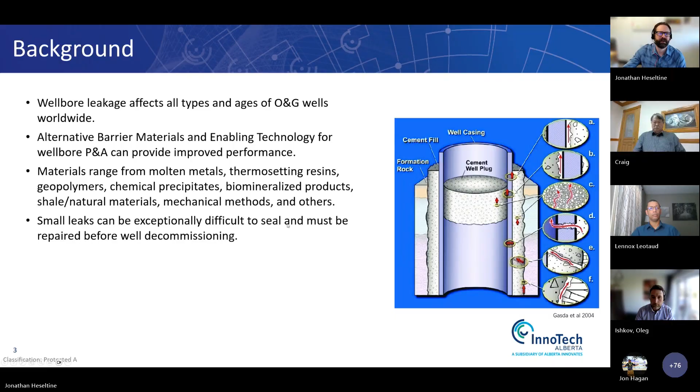With these types of wells, it's often the leaks that are difficult to repair, and due to regulations, when the well is being finally decommissioned, all of those leaks must be completely sealed off. So we're looking for alternative barrier materials or technologies that have characteristics that let us do that.

I won't read this list outright, but we're looking for the types of materials that can squeeze into small flow paths, cure into an impermeable material, and that can be placed properly in the presence of other fluids and the chemical and temperature environment. After they're placed, they must seal for eternity, so they must be resistant to corrosion and the other downhole conditions.

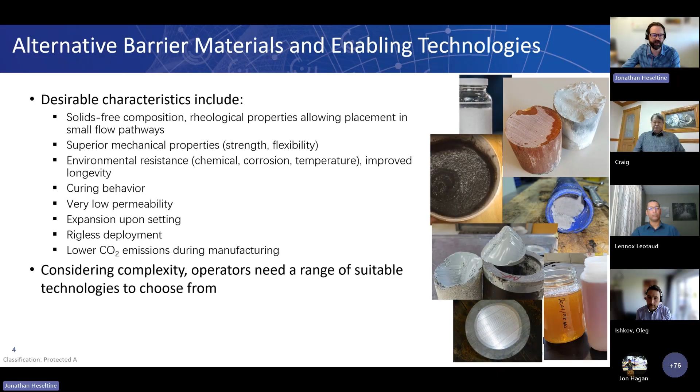We know that all wells might be similar, but they're all different in their own ways. So we're not looking for a silver bullet of one material that will solve the problems. We need a range of technologies to choose for a particular application.

With that, InnoTech has been involved in a joint industry project that's now wrapping up, with a mission to expedite the development and understanding of these types of new barrier materials. The methodology follows a pretty logical process.

We selected five products based on the participants' interests and expectations. Technical review of those materials allowed us to plan our lab testing program. In InnoTech's lab testing, we've developed an approach that's quite pragmatic, trying to simulate the downhole environment for the placement, sealing, and long-term durability of these materials.

When the materials have gone through the lab testing protocol, we have now completed 14 field trials with these materials. And then, of course, as a collaborative, data sharing is a very important part of the process.

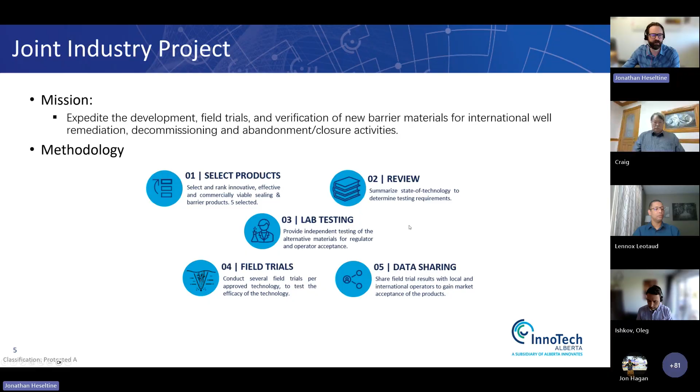So the objectives of this work are to define the suitable applications, sort of the operational envelope and best practices for these materials. To understand what wells we can use them in, we need to understand how they work and where they're best applied.

With that, we start to understand and realize there are regulatory and technology gaps that we can address. Working with material developers, we can optimize products. We're sharing the data and discussion within the consortium and publicly. Ultimately, with the understanding and development of these materials, they may become routine solutions to a widespread problem.

In terms of broader industry benefits, we're looking for a functional improvement compared to cement or other methods, where we can have eternal sealing of wellbores with confidence and understanding. This will lead to emissions reduction. There's direct leakage of gas from the wellbores, but also emissions due to the operation of the intervention.

The cost associated with decommissioning the worldwide inventory of wells is very high. So some industry groups have targeted a 35% reduction in decommissioning costs. There are other benefits, such as reclaiming land use where the wells are and reducing other risks, such as the liabilities of the suspended well inventory needing to be decommissioned, risks of groundwater contamination, and health and safety associated with these wells.

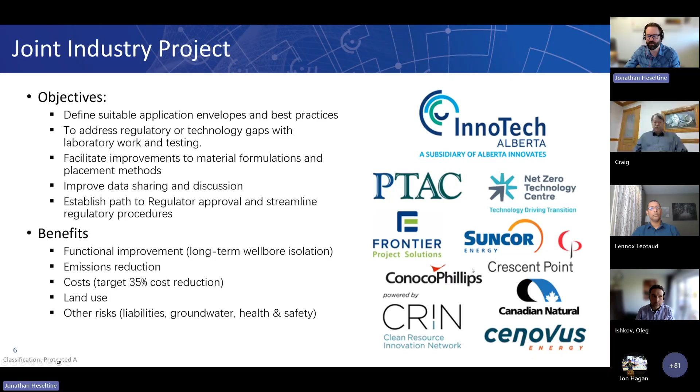You can see in the image there, we have a lot of participants in this project: funders and technical providers, as well as operating companies who are providing their guidance and wells for the field portion of the study.

To get into the technical results of this work, as I said, it's wrapping up, but just a few observations: what we've seen is that these materials do indeed have an envelope where they're best suited. So the lab testing work is to understand which types of wells these are best applied in.

The lab testing, due to its nature, tends to look at the material's technical performance. When you move into our field trials, we now have the whole as a system, and the geometry of that system and the requirements, as well as the chronological deployment process, are all considerations in planning the intervention.

So with that, full evaluation of these materials must look at the technical performance, the sealing, the longevity, displacement of fluids, contamination, all of those things, but also in the field, have to consider safety and environmental considerations, as well as time and cost of deployment.

And then finally, collaboration yields major results, major benefits. We've seen that throughout this project. The spirit of it is very much collaborative with the operators and with the technology vendors. Everybody wants these solutions to work. So there's been a great effort to share the results, and I think everybody benefits from that.

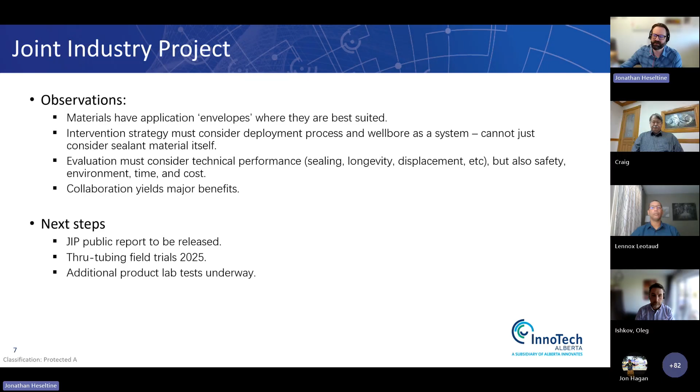In terms of next immediate steps, the public report from the project work will be released very, very shortly. You'll likely find a link on Innotech's website, NZTC, or PTAC, depending on your preference. There are currently additional field trials going on for through-tubing abandonment procedures. The idea here would be to plug a well without pulling the tubing first. We have additional products being tested in the lab right now. So those are the immediate next steps, and we have other work planned.

So with that introduction, we're going to move into the presentation component of the webinar. We have three speakers today who I'll introduce briefly here.

Our first speaker is Oleg Ishkov. He's the CEO and founder of Rockit. Next we'll have Lennox Leotaud. He's technical marketing supervisor for Well Armour and also the president and co-owner of Olive and Branch Merchandising and Distribution. And then our final speaker will be Craig Brown, the founder and inventor of UVT Solutions.

The structure of the webinar, as John mentioned earlier, we will have a speaker followed by about 10 minutes of Q&A. Please type your questions into the chat while our speakers are presenting, and I will read them out following the presentation. If we have some time at the end, we can circle back to any unaddressed questions or any questions for any of the speakers.

And so with that, I will turn it over to Oleg from Rockit. Thank you, Jonathan. So I'll share the screen.

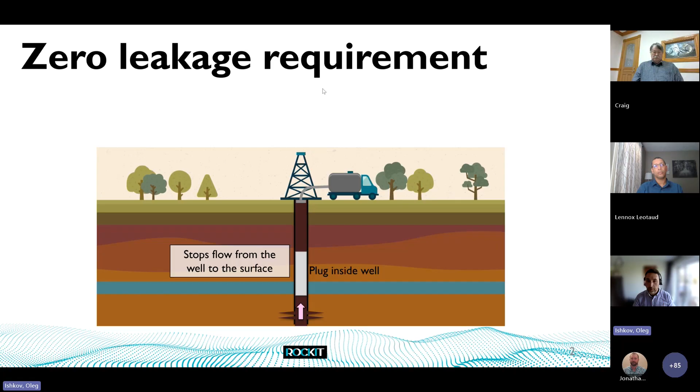As Jonathan mentioned, one of the hardest challenges is actually sealing the smallest pathways, because the current industry approach is most solutions install plugs that cut the flow from the wellbore to the surface, right? But unfortunately, the leaks still persist.

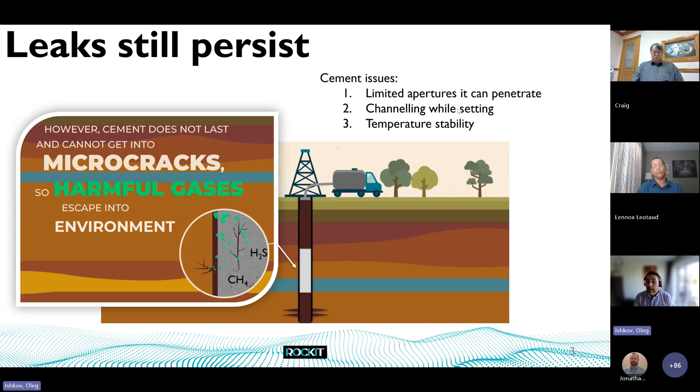If you're talking of cement, obviously we are not targeting to completely replace the cement. Cement is good, it's fantastic material. But obviously in the industry, there is well-documented issues with cement, and it cracks, it's brittle, so there is a limit due to viscosity, the solids present in cement, and the temperature stability. So at the moment, there is a demand for new solutions.

So Rockit is different in this case. We are offering a seal, and we're creating a barrier at the source. We are cutting the flow from reservoir into the wellbore. So in this way, the plugs, cement, or some other metal alloy materials can be better protected from future degradation.

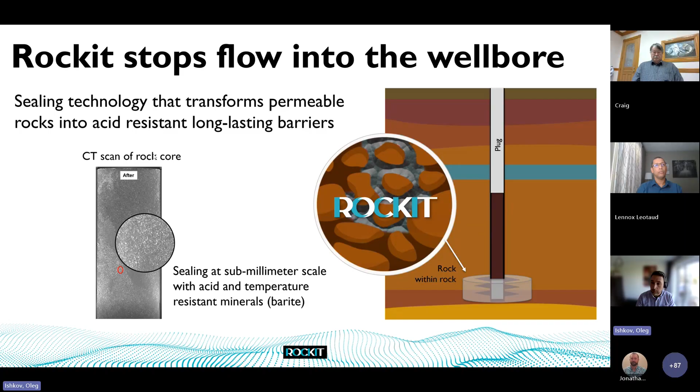So in essence, our technology transforms rocks into barriers themselves. And we use acid-resistant, long-lasting minerals which is very well known in industry - it's barium sulfate, and this material is naturally resistant on geological timescales. On the left, you can see this CT scan of the rock core sample that we sealed with barium, with our Rockit seal, and basically this illustrates that we can penetrate into the smallest pores and seal within the rock.

Also, the technology we offer uses solids-free aqueous solutions, two of them. We don't use any other scale inhibitors, or we don't require any nutrients. So it's just two solids-free liquid aqueous solutions pumped into the well, and then, through a reaction in the formation, those chemicals react and precipitate significant amounts of minerals.

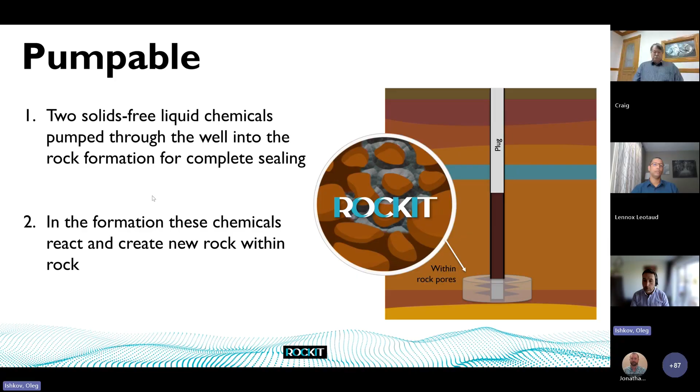So we call it rock within the rock. By doing so, using the solids-free and low viscosity solutions - viscosity of our solutions is very close to water, so 1.4 centipoise - we reduce the risk of fracturing. So basically, we can inject wherever water can be injected.

So we can address the smallest flow path, and because of this, this also opens up a door to use our solutions as the potential for rigless application, because in a sense it's just aqueous - basically salty brine or aqueous solutions you need to pump. But the material properties of barium sulfate open up a door for permanence.

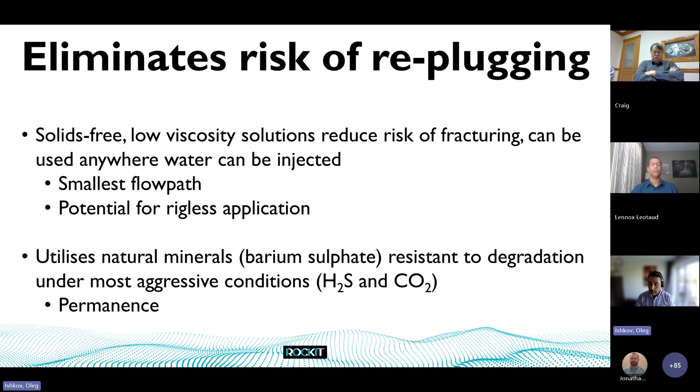Basically, the barium sulfate is one of the hardest scales known in the industry. It's very difficult to remove. As soon as it adheres very well to steel, rock, and any materials, it withstands most aggressive conditions, high H2S and CO2 content, and it's one of the extremely insoluble minerals known so far. So this is a very permanent material.

So building on this, we believe that there is opportunity for significant cost and time efficiency, because standard pumps can be used. There is no tools requirement, so high pressure pump, and the procedures are very well known. Consider this as a squeeze treatment - when you squeeze solutions, it's a very well known, established procedure with an established verification process, and the reaction is quick.

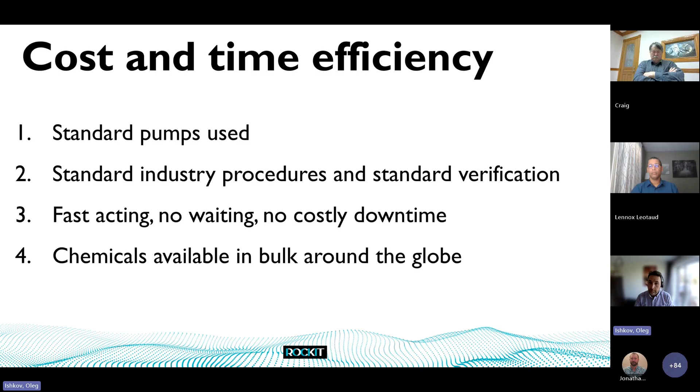And then another advantage that we came up with in our research and development is that the chemicals we use are already available in bulk around the globe. So we can scale this with the help of industry partners much quicker, and we believe this could reduce the barrier for industry adoption.

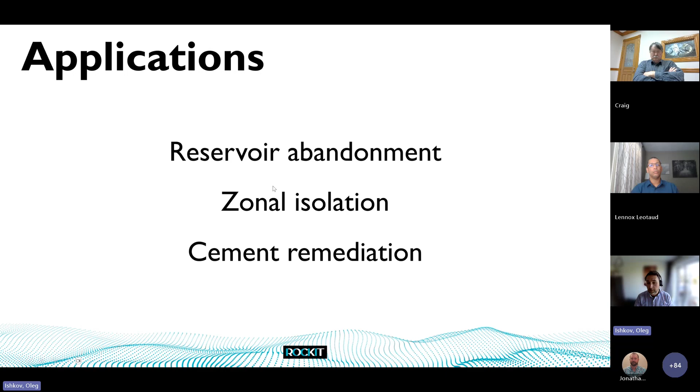There are different applications that Rockit can be applied to, spanning from reservoir abandonment to zonal isolation and cement remediation. And speaking of the deployment options, there are several methods that our technology can be deployed. The very first one - and again this is our target and how we think ideally it could be performed - is using bullheading or using a single flow path, iteratively.

Because we use 2 solutions, they need to be separated with an aqueous spacer to protect the flow path itself. However, there are also different deployment options available. For example, we can use coil tubing - we spoke with providers of coil tubing. So if the well is not deep and quite shallow, the coil tubing can deploy the first solution, then the coil can be pulled up, cleaned, and the second solution can be pumped.

This way, we remove the need for an aqueous spacer between the two solutions. If well design allows, we can also deploy concurrently through different flow paths - for example, through the production tubing and behind tubing, we can discuss it. Or, for example, with concentric coil tubing. And obviously, if specific targeting for the placement is required, our solutions can be deployed via the tool.

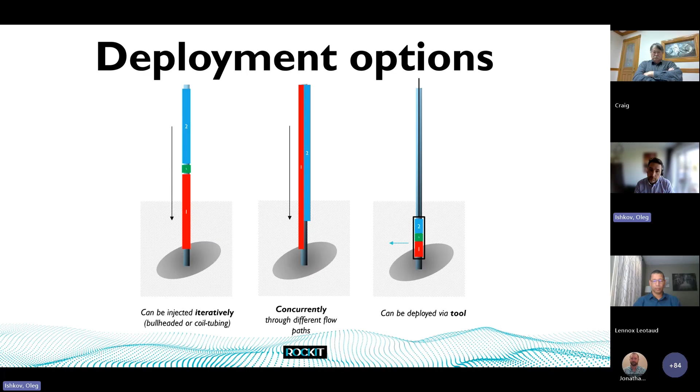This gives a downside in that with the tool you're limited with volumes. With bullheading, you're not limited with volumes. You can pump as much as you need.

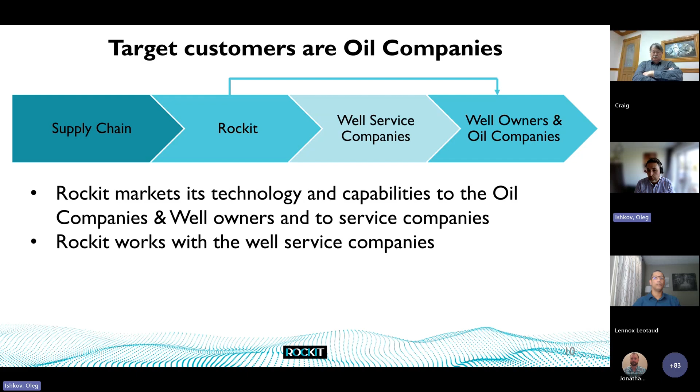Now, how do we plan to take this forward? Well, we don't have pumps or capacity to provide services. So our target is to work with oil and gas companies, but with partnership with well service companies who already have capabilities, pumps, and established relationships, who would deploy our solutions to the oil and gas companies and take care of the supply chain and basically provide the product. And the product is salts that need to be dissolved in water and just pumped.

So where are we at the moment, and how do we see this taking forward? Rockit is a fully functional prototype. We believe we are at TRL level 5, and as a note, our lab has decades of experience actually preventing mineral scale from precipitating. So we are turning this problem into a solution.

We've run a lot of tests, and we can block the rock and hold 1000 psi pressure differential with no flow on effluent. We can destroy the permeability by almost 99% and more. And it's not just us who tested this technology - it was validated with one of the oil and gas majors in their R&D labs. We have patents granted in the US and UK. And behind us we have a very experienced team of oil and gas veterans.

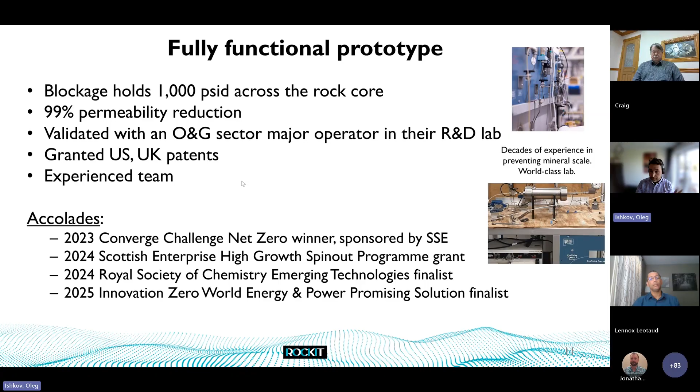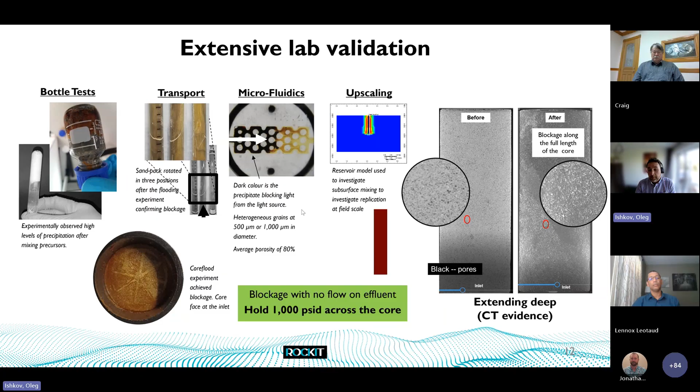In the interest of time, we can leave that for later discussion. But the key message is that we've done extensive lab validation, and the next step for us is to engage with established partnerships to narrow down the commercial case for adoption, be it cement remediation or reservoir abandonment, and then establish partnership for the field pilots.

So if I may, my ask would be that if there is interest for our technology, we would be very happy to hear from you. And if you supply well candidate parameters, we can then model the deployment, design the treatment, and provide you a cost for the field pilot, and we can take it from there for the future success of the technology.

I hope that in the end we will be successful in building this sealing technology that will leave no leaking wells for the next generations. This is our big goal. This is me, thank you very much, and I would very welcome questions.

Thanks, Oleg. A few questions coming in, so I'll read them out. The first is from Ken Massich: what sort of reaction time is expected for when the two substances come together in contact?

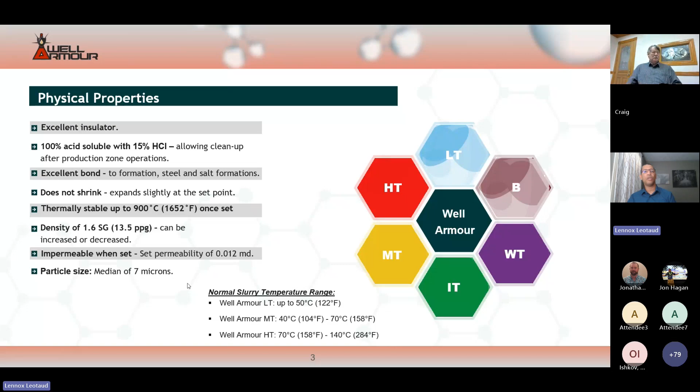So the Well Armour slurry does have a particulate fraction to it. That being said, unlike say a cement slurry, if you were to use the Well Armour slurry in a tight formation, or you're looking to squeeze it into a very narrow channel, even if you were to screen out the particulate fraction of the Well Armour slurry, the filtrate will still set. So that's a big performance difference of the Well Armour as compared to a cement slurry.

That is when it transitions from a liquid to a solid state. That transition, which we call a right angle set, always occurs within 120 seconds. By contrast, a cement system goes through a gel strength development phase when it transitions from a liquid to a solid material, without having to provide too much detail, it is this static gel strength development property of cement

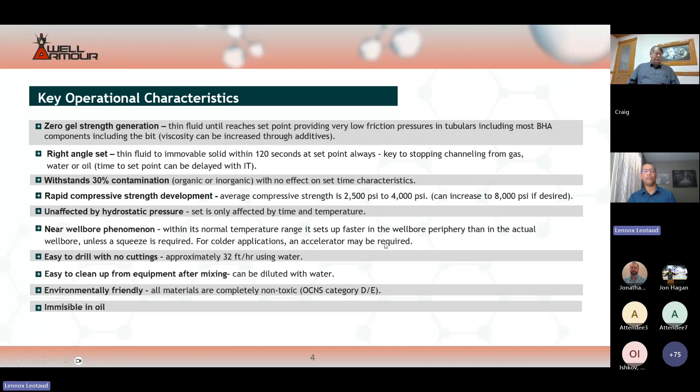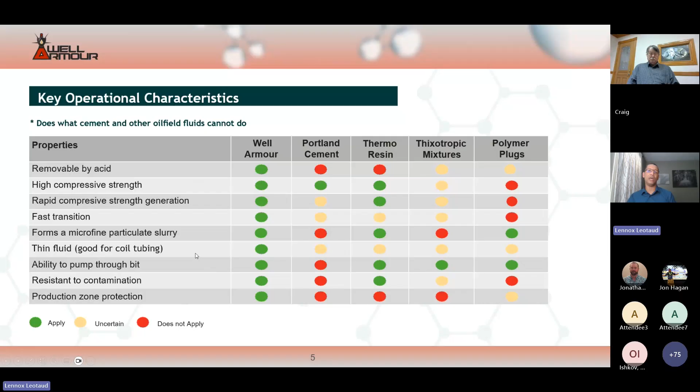Well Armour can be used in various applications throughout the life cycle of a well. For example, during the well construction, the drilling phase of a well, you can use Well Armour for casing shoe squeezes, for stabilization of unconsolidated sand or shales, for moderate to total loss circulation. You can also use it as an alternate lead or tail slurry.

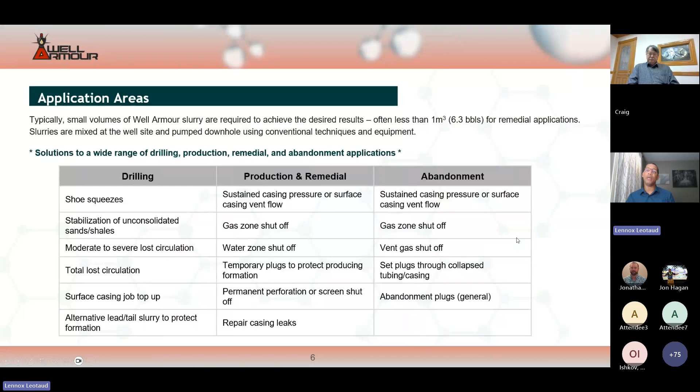It can be used on producing wells also to address sustained casing pressure issues, water influx issues. It can be used as a temporary plug, as mentioned earlier, and it can be used to repair casing leaks. For well abandonment, you can use it again for sustained casing pressure, or surface casing vent flow, gas shutoff, and for general abandonment plugs as well.

I wanted to give further emphasis on sustained casing pressure and surface casing vent flow, because it continues, as mentioned earlier in this webinar, to be a huge challenge in almost every oil and gas field. And Well Armour can be an ideal solution to address this issue owing to the benefits that it provides.

Sustained casing pressure can present itself in a couple of ways, but for the case where the production casing annulus is not cemented all the way to surface, which is the case for most shale play development wells here in the US, what some operators are doing is running a flexible hose, a half inch or three-quarter inch hose, through the wellhead valve, running it as deep as they can get it, and pumping a weighted brine. It could be a 10 pound per gallon brine, a 10.5, 11 pound per gallon brine or higher, to try and add some additional hydrostatic pressure to lower that sustained casing pressure.

Well Armour can be an alternate solution here if allowed, both by the operator and by the regulatory body, because you can also pump it through those small ID flexible conduits or hoses, and instead of it being a brine, you'd have a system that can set in the annulus and give you a better isolation. And the properties of it will enable you to also do it in a rigless capacity.

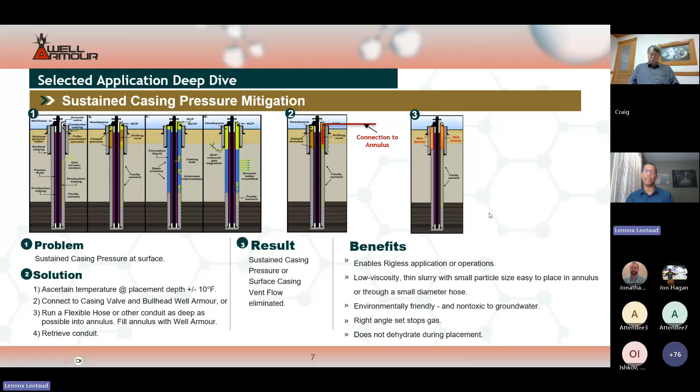If addressing sustained casing pressure in that way is not an option, and for example, for well abandonment type scenarios, a more direct approach would be to squeeze Well Armour through a retainer or through a packer into where the particular channel or gas flow may be originating, and you can isolate or shut off the gas in that way.

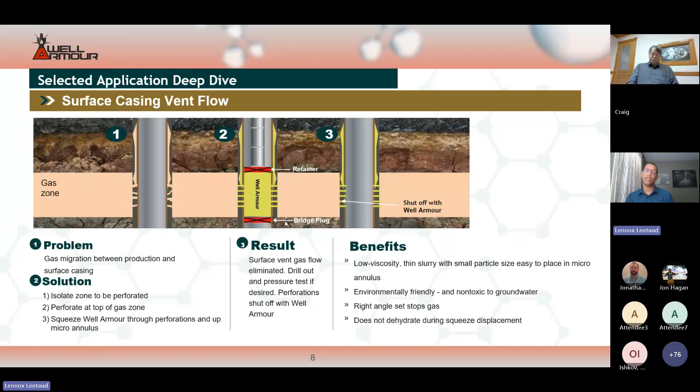Using a retainer or packer is at times a preferred method to utilize the Well Armour slurry, because in this way you're able to trap pressure below the retainer or packer, allowing you to leave pressure on the system, whilst the Well Armour is able to transition from a liquid to a solid state. And the benefits here, as mentioned earlier, also apply.

Lab testing in most cases is always done on the Well Armour slurry prior to a job. The test primarily done is a set time test, also known as a thickening time test when done for a cement slurry, because the equipment used to perform the set time testing is a standard consistometer that's typically used to perform thickening time testing for a cement slurry.

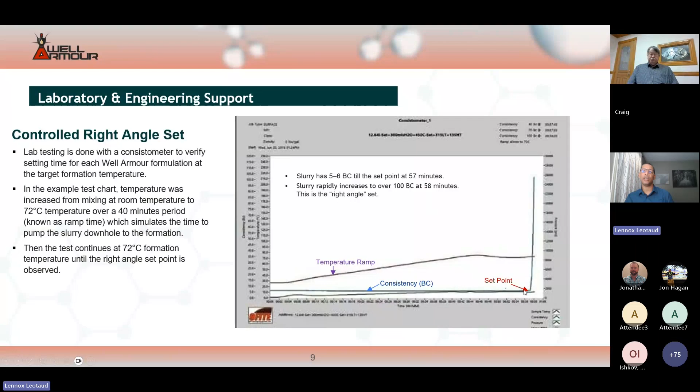This chart here is an example set time test done on a Well Armour slurry, in which the temperature was ramped from room temperature to 72 degrees C, simulating pumping the Well Armour from surface to the reservoir zone. Once the slurry gets to the reservoir zone, there's a dwell time where the temperature remains the same. In this particular test, after about 57 minutes, the set point is reached, and you see the classic right angle set of the Well Armour slurry.

So if you do a test and you get, say, 90 minutes in the lab for your set time test, under the same conditions in the field, that's what you're going to have to work with, or that's what you're going to achieve in terms of a set time with the Well Armour system.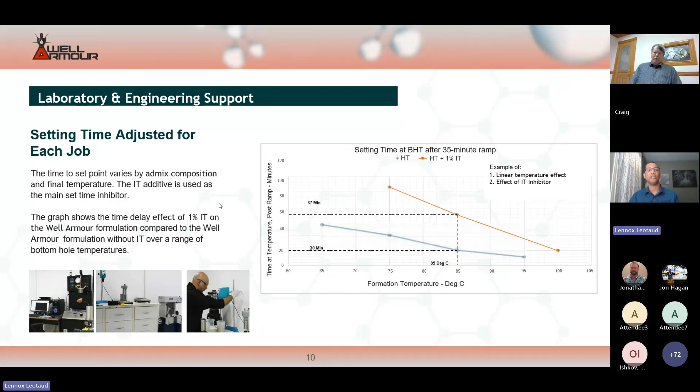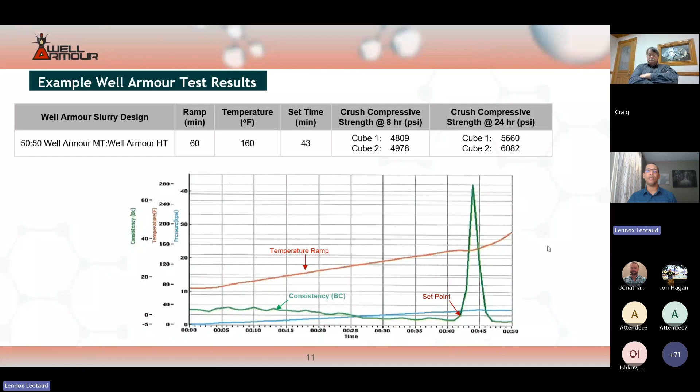Here's another example of a set time test that was done at up to 160 degrees. The ramp time was 60 minutes, and you can see the set point occur right at the 43-minute mark. Also provided here is some compressive strength development data. You can see that 8-hour compressive strength values are around 4800 to 4900, and 24-hour compressive strength values are around 5600 to 6000 psi. That gives you an example of the compressive strength build of the Well Armour product or system.

Shown here is a video. In this video is an example of the Well Armour slurry being mixed, and you'll see how it looks in slurry form. Here's a picture of some molds that were done after the Well Armour slurry was mixed. We poured it into some molds, and this is provided here as an example of how the product looks when it's set.

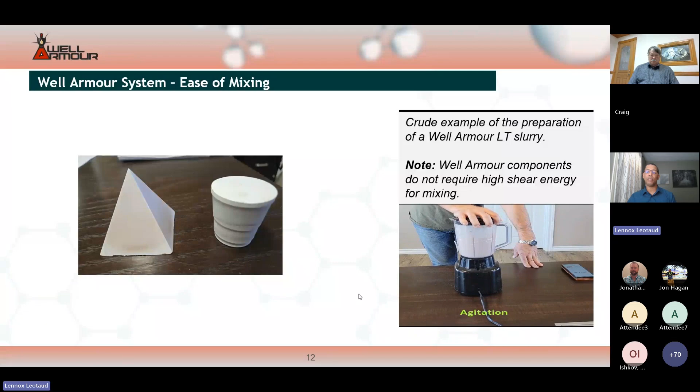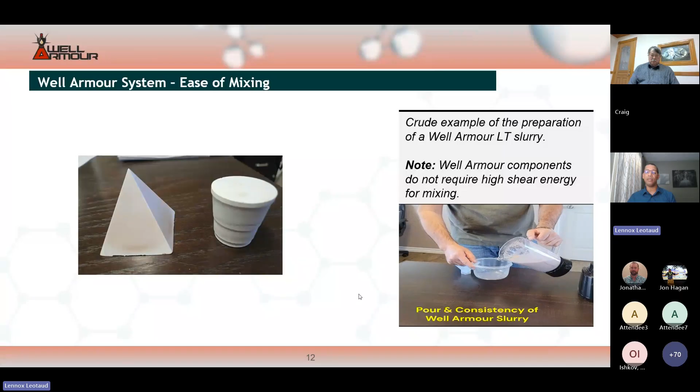This video is a crude example because the Well Armour components do not require high shear energy for proper mixing. The Well Armour slurry can be mixed in any standard oil well cement mixing equipment. The Well Armour material, when sent to a well site, will generally be provided in 50-pound bags on a pallet. So to avoid having to lift the 50-pound bags or use a forklift to lift the pallet up to the mixing platform of a cement unit, if a jet mixer is available, it can be used to add the sack material to the jet mixer at ground level. For large volume jobs, the preference is to mix the Well Armour slurry on the fly.

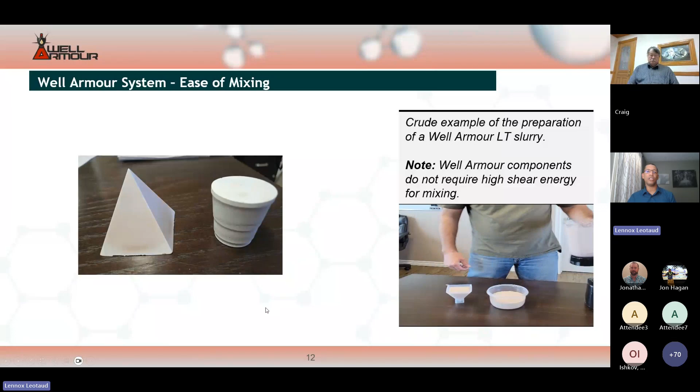You can add, for example, the Well Armour LT, MT, or HT component or inhibitor into a bulk truck, and send that bulk truck to the well site location to mix the Well Armour on the fly.

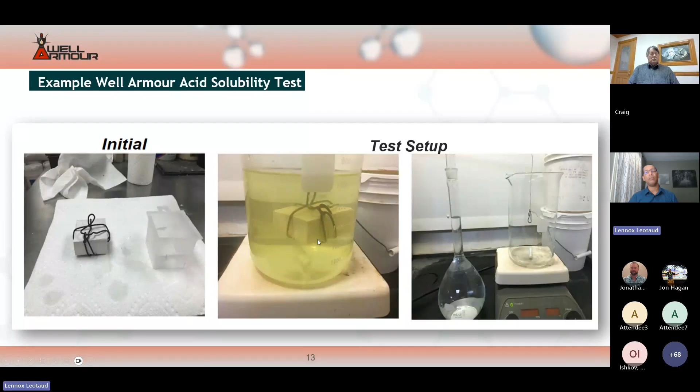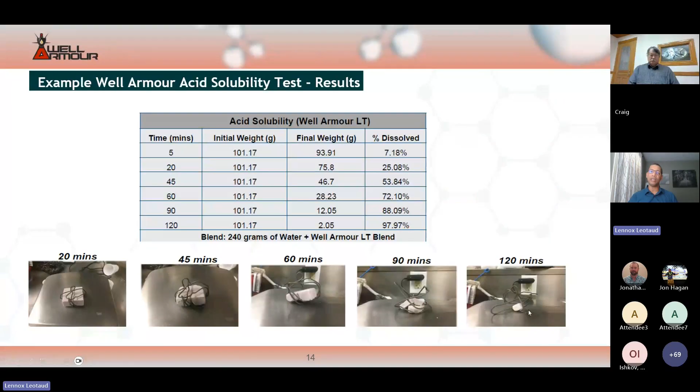This is an example of the acid solubility of the Well Armour system. A test was done using the Well Armour cube, a hot plate, and a magnetic stir rod to stir the acid for the duration of the test, using 15% HCl. After 120 minutes, almost 98% of the Well Armour was completely dissolved. These pictures show at particular timestamps the amount of Well Armour that was dissolved.

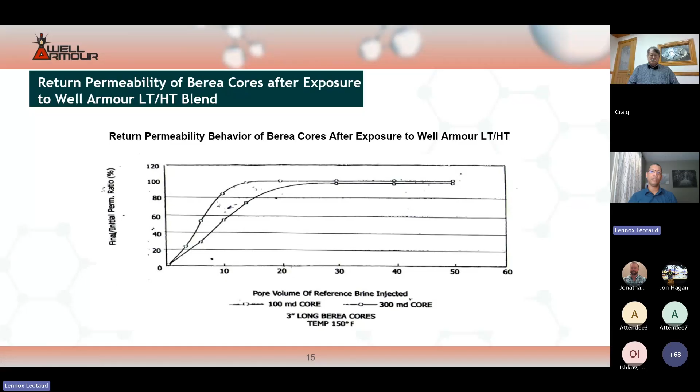Return permeability testing has also been done on Berea sand cores to show the ability to remove Well Armour from a formation using acid if necessary.

Some drillability testing is provided here as an example. We've already done jobs and have been able to drill out Well Armour successfully without any issues. Initially a small scale test was done where Well Armour was placed in 7-inch casing and a Baker underreamer assembly was used to drill it out. For that test, an ROP of 25 to 30 feet per hour was achieved, and just using water circulated at 1.6 barrels per minute, we were able to transport the cuttings and get it out of the test setup.

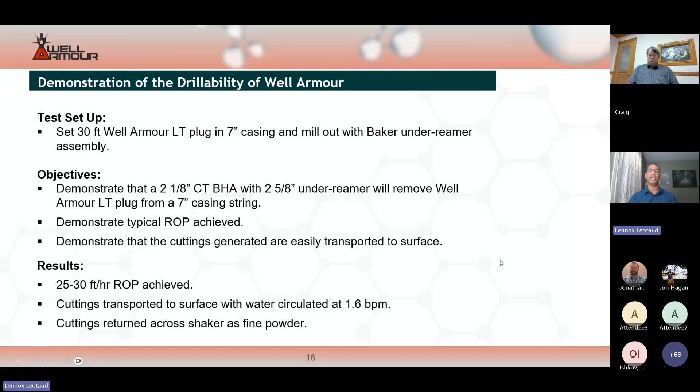When using the Well Armour technology, there are some do's and don'ts we always want to highlight, because Well Armour is totally temperature and time dependent. We need an accurate estimation of the maximum temperature to be encountered during slurry placement, plus or minus 4 degrees C or plus or minus 10 degrees F.

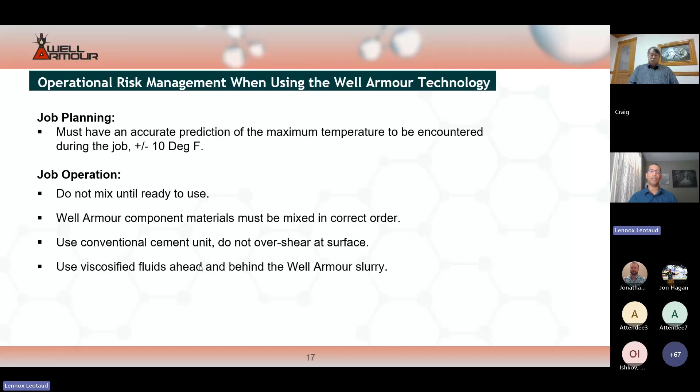You do not want to mix the Well Armour slurry until you're ready to use it. You must mix the Well Armour components in the right order, and in most cases we would recommend the use of viscosified fluids. Small volumes, as little as 1 to 2 barrels, can be pumped both ahead and behind the Well Armour slurry to separate it and limit any intermixing with the wellbore fluids in the well.

Here's a case history for which Well Armour was used in the DJ Basin, Colorado, during a plug and abandonment operation. The well operator was experiencing 66 psi of Bradenhead gas pressure through the 9 5/8-inch casing. After pumping 4 conventional cement plugs unsuccessfully, the well operator decided to use Well Armour.

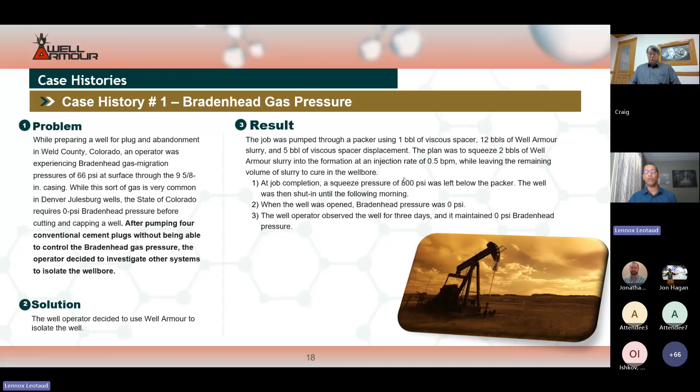Squeezing through a packer at 0.5 barrels per minute, 12 barrels of Well Armour slurry was pumped, of which 2 barrels was squeezed into the formation, and 10 barrels was left in the 9 5/8-inch casing. A squeeze pressure of 800 psi was left on the Well Armour slurry overnight, and when the well was opened up the following morning, the Bradenhead pressure was 0 psi.

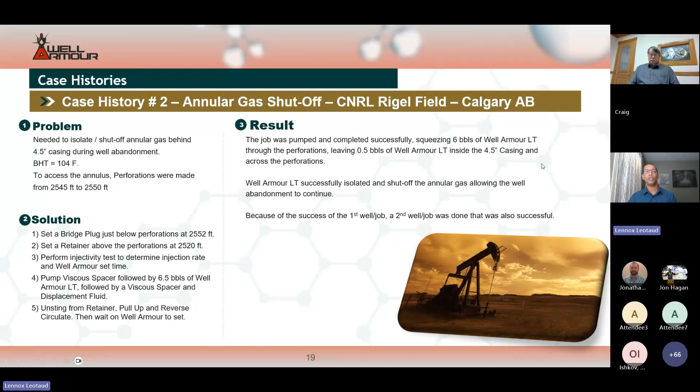Here's a second case history in which Well Armour was used to shut off annular gas on a CNRL well in Calgary. During well abandonment, the operator needed to shut off annular gas behind the 4.5-inch casing. Squeezing through a retainer, a total of 6.5 barrels of Well Armour LT was pumped, of which 6 barrels was squeezed through perforations at 2545 feet, and 0.5 barrels was left in the 4.5-inch casing. The application of Well Armour was able to completely shut off the annular gas, allowing the well abandonment operation to continue.

In summary, Well Armour is designed to do what Portland cements and resins, for example, cannot do. The Well Armour system always sets under 120 seconds with zero gel strength generation. The set point is pretty linear, as discussed earlier, and the set point attained in the lab is pretty transferable to the field. We can achieve very low set time targets.

We can also achieve very long set time targets if necessary, say for a lubricate and bleed type operation. Well Armour expands at the set point and builds compressive strength rapidly after setting. It is totally temperature and time dependent, and it is unaffected by bottom hole pressure.

Due to the low or micron size particulate nature of the slurry, you are able to pump it through a bit, and through narrow IDs. As mentioned earlier, it is acid soluble with 15% HCl. It can withstand contamination up to 30% and still achieve close to the design set time characteristics. No special equipment is needed or required to mix and pump Well Armour.

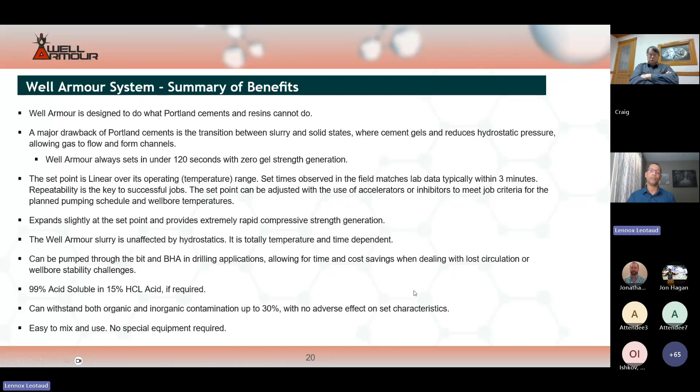How low is the temperature limit for the LT? Says, for example, 8 degrees C. We have some shallow and cold wells here in Canada. As shown earlier, it can be used at those cold temperatures. It's not shown here, but if needed, we can further accelerate the set of the Well Armour slurry for very, very cold temperatures. As I mentioned earlier, due to the fact that the set of the Well Armour slurry is an exothermic type reaction, that enables you to utilize it at very low temperatures as well. But if necessary, if it's very, very cold, say 15 or 20 degrees Fahrenheit, we can further accelerate the set of Well Armour for those very cold environments.